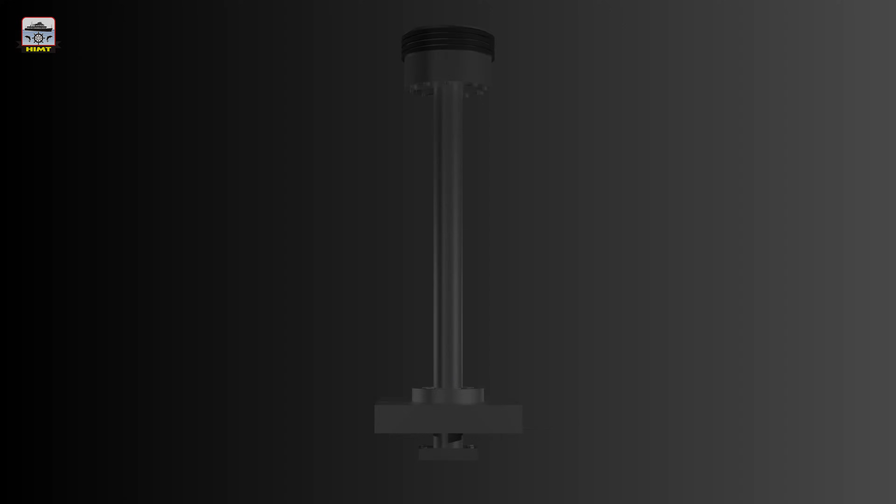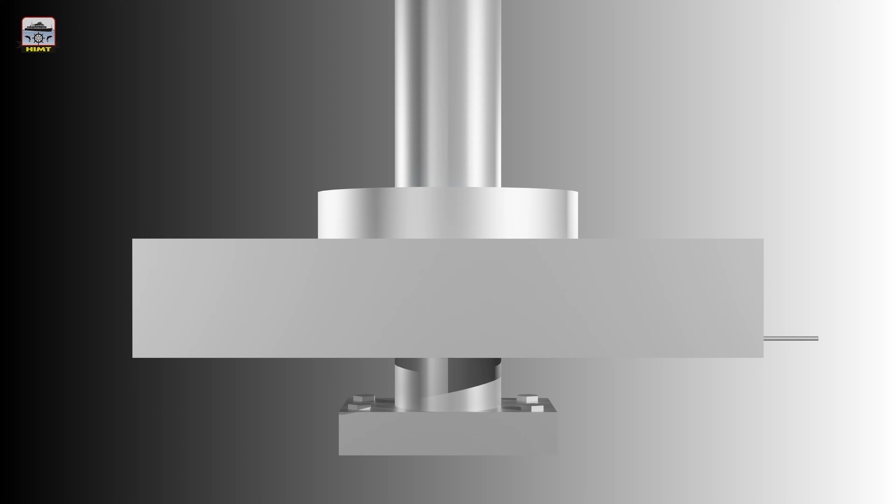A stuffing box is used in two-stroke marine main engine, which is of cross-head type. The function is to prevent crankcase lube oil going to scavenge space during piston upward stroke, and to prevent contaminated lube oil and combustion gases coming to crankcase during piston downstroke.

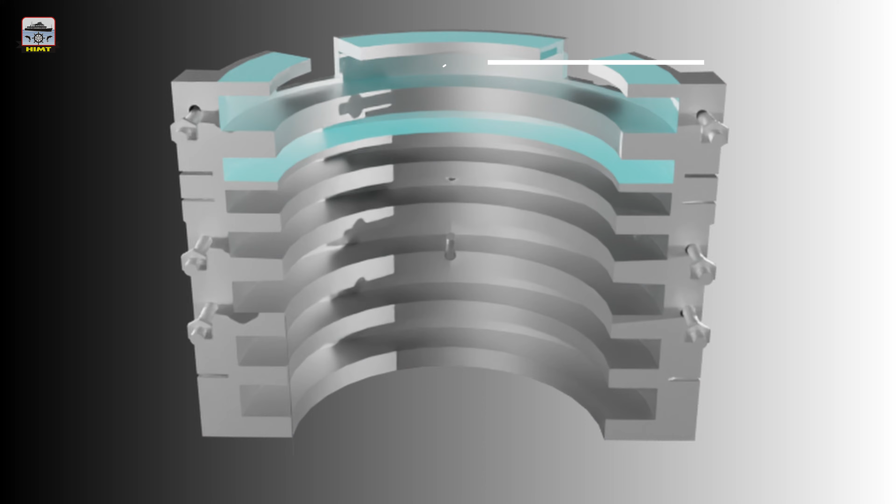The stuffing box is in two halves, vertically split and put together by fitted bolts and nuts. Inside of the housing, many circumferential grooves are provided. The two uppermost grooves accommodate sealing rings to prevent blowing down of scavenge air along the piston rod. The bottom grooves are fitted with scraper rings to scrape lubricating oil from the piston rod. The sealing rings are in most cases made of brass, while scraper rings are made of steel.

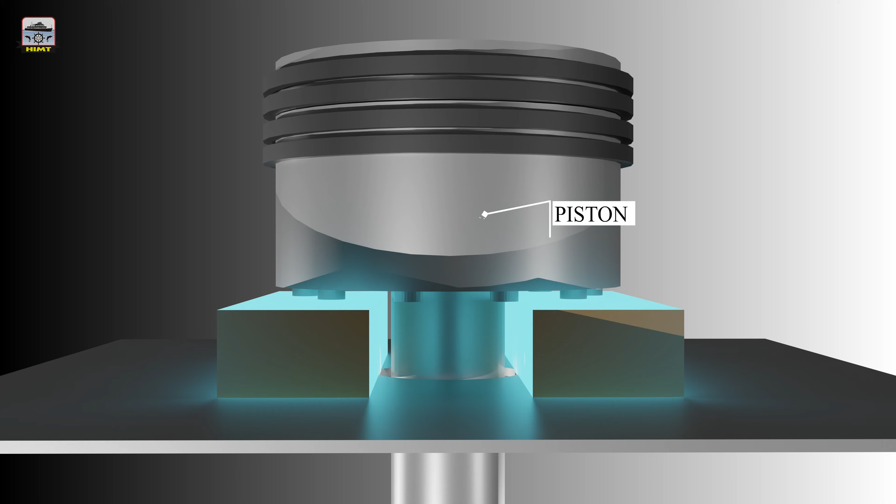Normally, overhaul of the piston rod stuffing box is carried out by routine methods in connection with the overhauling of the pistons. The piston is pulled out of the cylinder for the overhauling. During such overhauls, the piston rests on a support placed over one of the cutouts in the top platform. Work on the stuffing box is then carried out from the platform below.

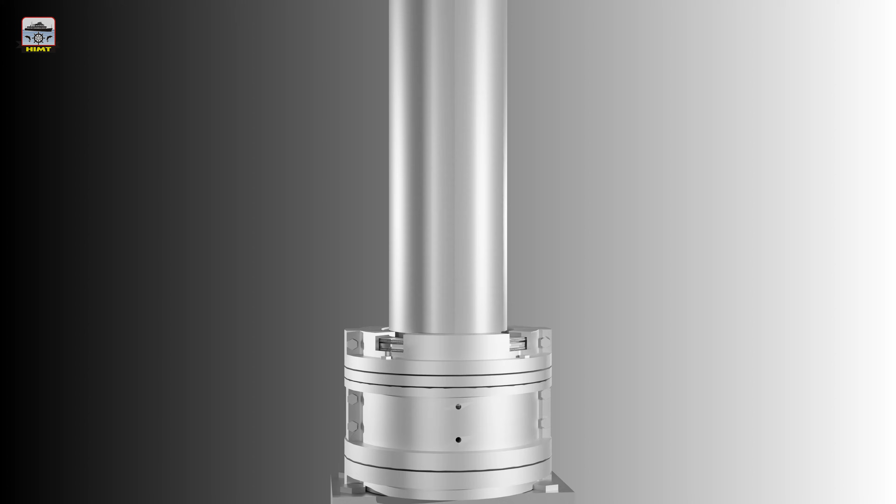If, in the period between piston overhauls, it becomes necessary to inspect the piston rod stuffing box, proceed as follows. However, this video description must be taken only as a guidance. Turn the crosshead to about 90 degrees from TDC. Mount the rubber cover around the piston rod to protect the crosshead bearing from impurities. Remove the drain oil pipe after removing the securing screws.

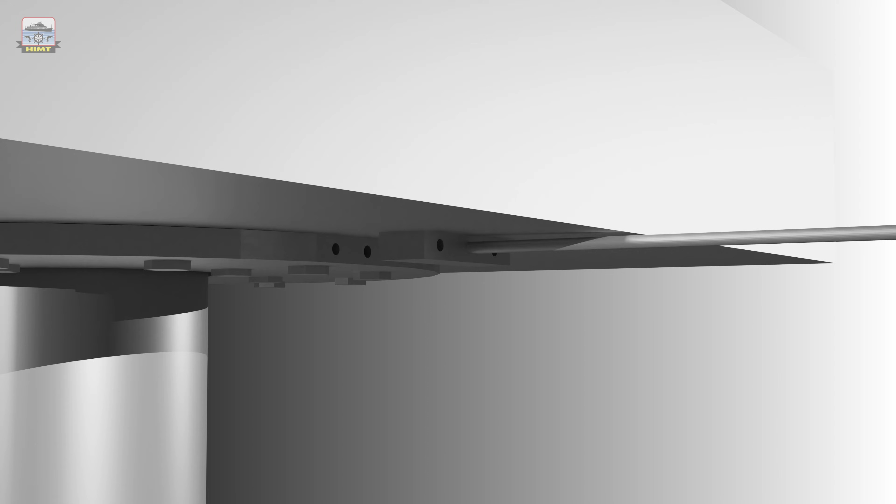The stuffing box is secured to the flange at the bottom by the innermost screws. The outermost screws secure the flange to the bottom of the diaphragm. Remove all innermost screws. Now, remove all outer screws except for two screws placed diametrically opposite in the stuffing box flange, longitudinally to the engine.

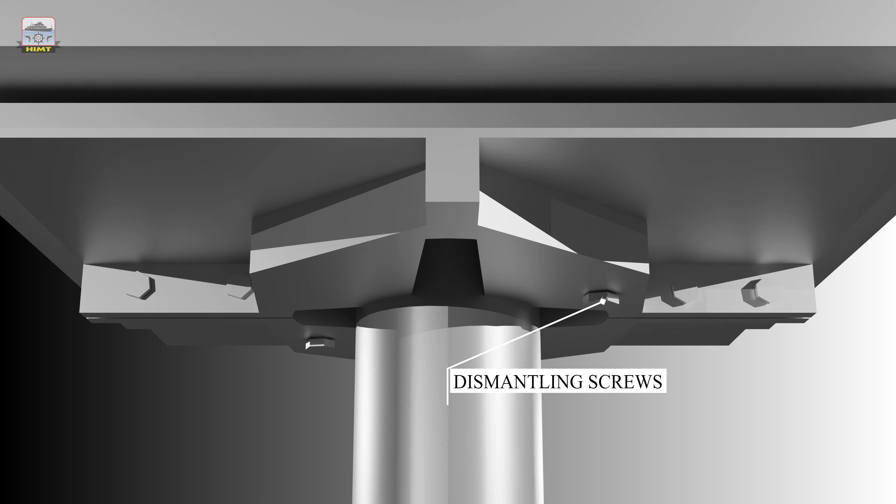Fit the worktable around the piston rod so that the two remaining screws in the stuffing box flange can be loosened through the holes. Using the two long dismantling screws provided with the work table, secure the stuffing box along with the work table. Remove the remaining two screws from the stuffing box. Turn the piston to BDC, thereby withdrawing the stuffing box from the cylinder frame bottom. Remove the two long dismantling screws from the stuffing box.

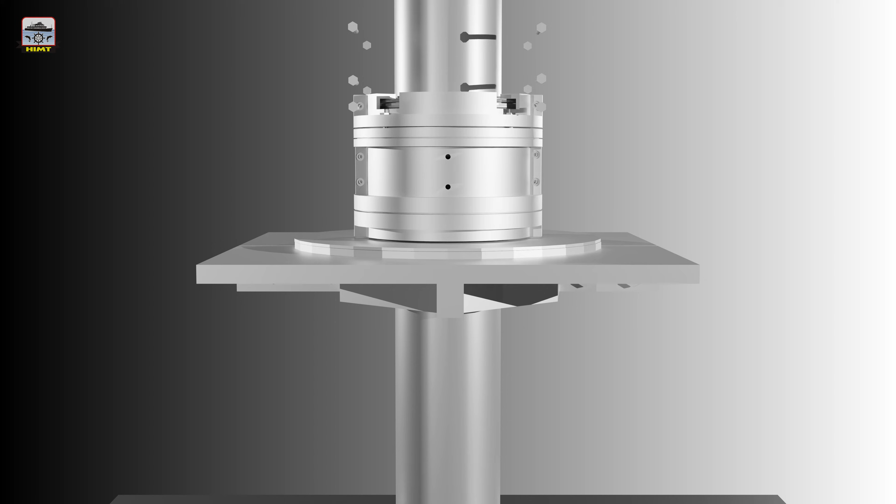Press the stuffing box out of the flange. Overhaul the stuffing box as described below. Remove the O-ring of the stuffing box. If the O-ring is intact and is to be used again, move it up the piston rod and secure it with a tape. Remove the nuts from the stuffing box assembling bolts. Take out the 6 bolts. Pull away one stuffing box half and remove it from the work table.

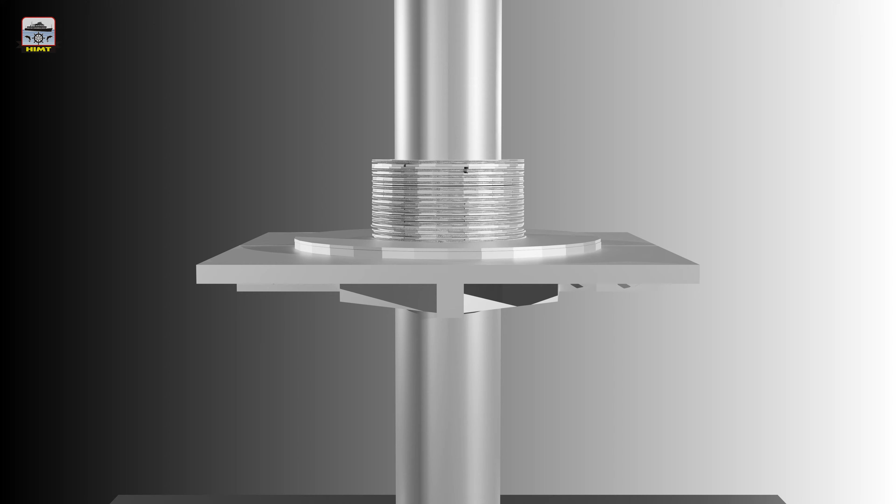Using a feeler gauge, measure the axial clearance between the rings and grooves. Remove the remaining stuffing box half. Press all sealing rings and scraper rings down against the work table. Remove the spring of the topmost ring set. Using the tool provided, measure the aggregate of all butt clearances between the ring segments of the topmost ring set to determine whether replacement is necessary.

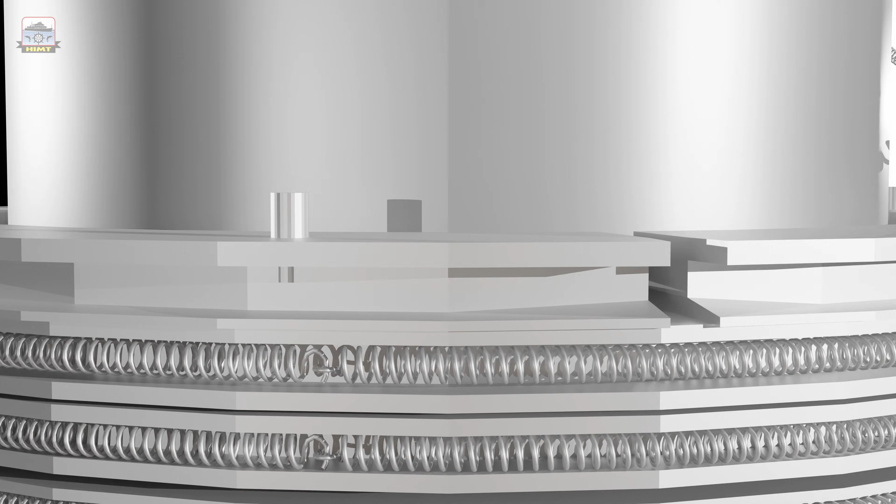Remove the rings and keep them in the marked place so that they can be fitted in the same order while boxing back in the stuffing box. Repeat the process of spring removal and butt clearance measurement for all ring sets. Carefully clean all the ring segments. Inspect and assess the surface quality of the sealing rings. If their sliding surfaces have scratches or marks, replace the rings. Check the links of the springs.

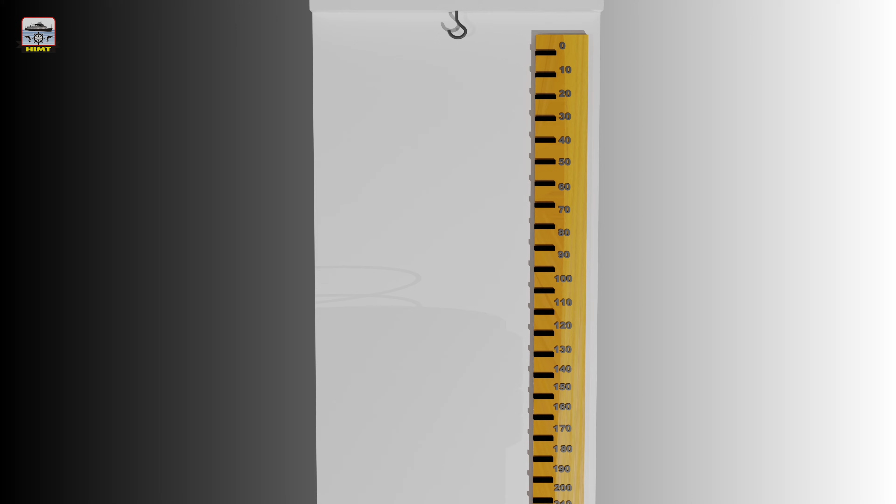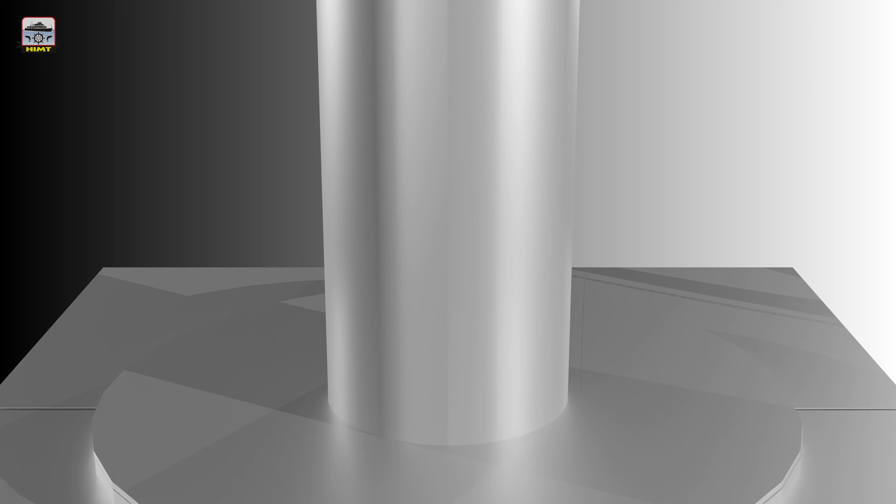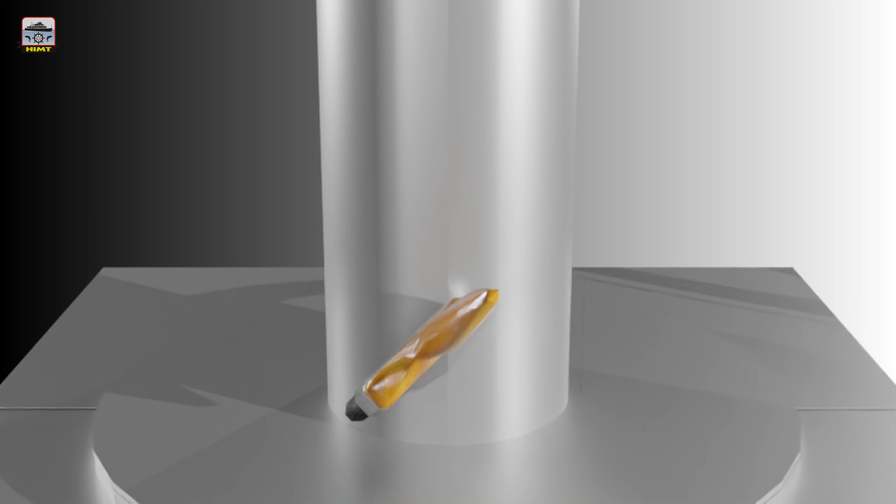Inspect the surface of the piston rod. If small longitudinal scratches have occurred caused by poorly adapted stuffing box rings, smoothen the piston rod surface carefully with a fine-grained carborundum stone. Clean the halves of the stuffing box housing. Lubricate the piston rod in the area where all the ring units in the stuffing box will be positioned with molybdenum disulfide. Place the lowermost ring segments on the work table.

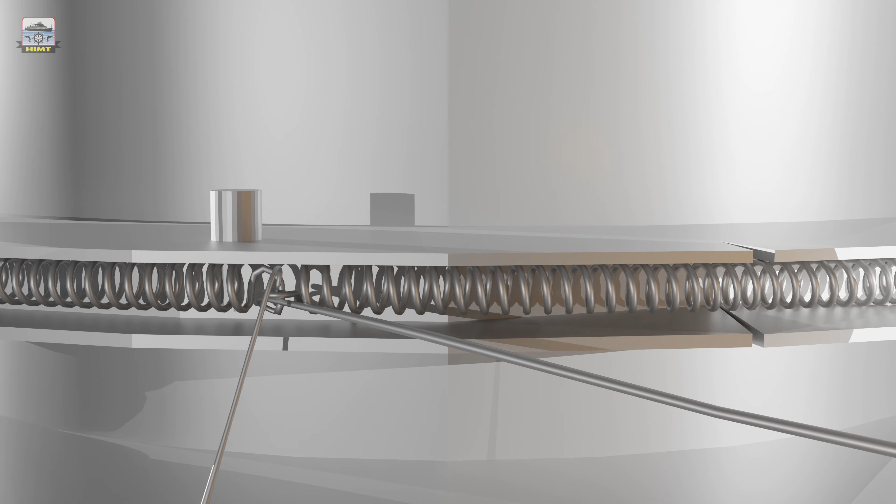Place the spring around the segments. Grab the hooks with crossed arms and pull the spring tight. Hook the spring ends together and remove the hooks. Repeat this procedure for the remaining rings. Try to position all the rings with an equal distance between them. Use the stuffing box gauge tool to adjust the spacing between the rings.

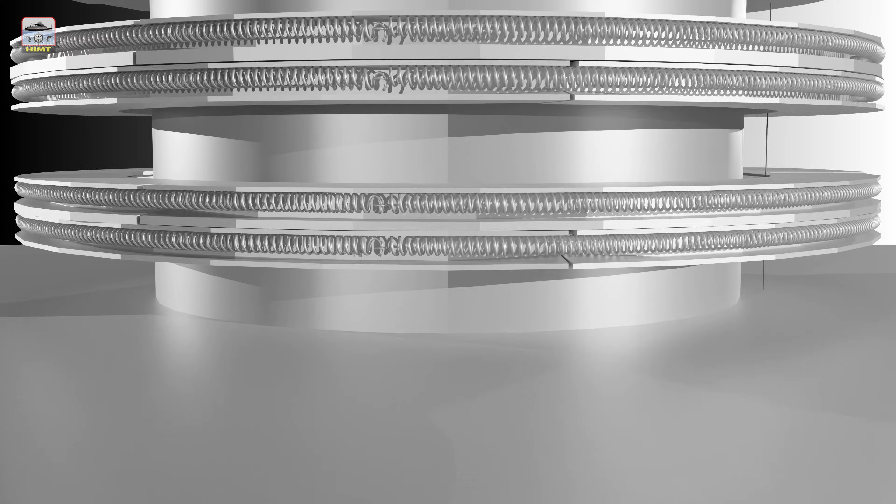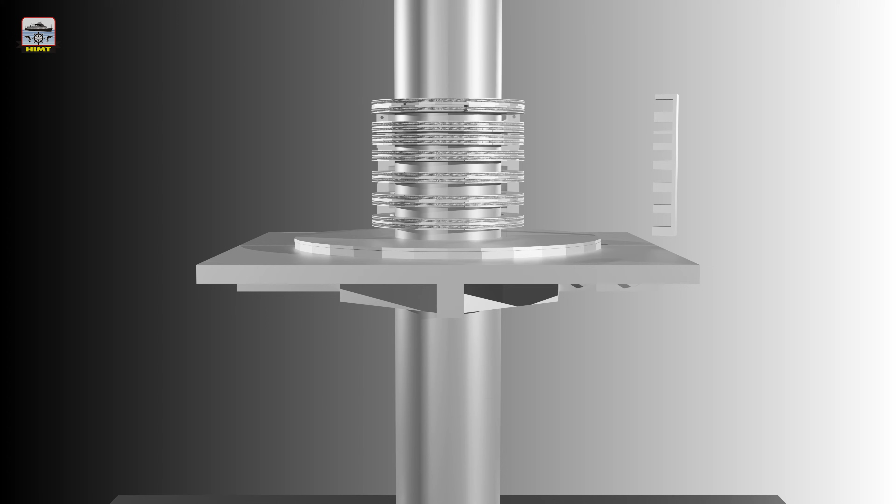This is done by carefully inserting the teeth of the gauge tool within the rings and then carefully moving the gauge along the springs. Use the stuffing box half on the work table to adjust the height of all the assembled ring units on the piston rod until the ring units are matching with the corresponding grooves in the stuffing box housing. Subsequently, push the stuffing box half into contact with the piston rod, round the ring units.

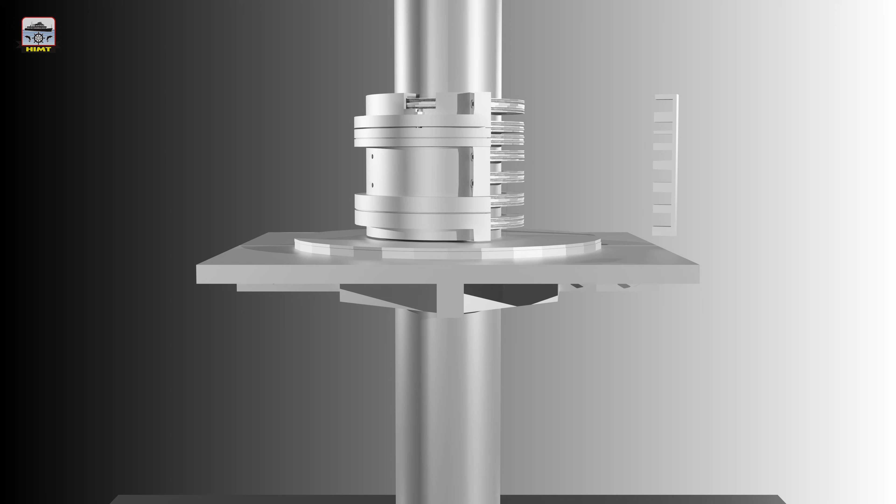Insert the gauge tool at one end of the stuffing box half and carefully slide it along the entire length of the scraper and sealing rings, thus adjusting the distance between the remaining exposed segment. Push the other half of the stuffing box into contact with the piston rod, thus enclosing the ring units. Mount and tighten up the fitted bolts to the torque specified by the maker. Tighten the other bolts to the torque specified.

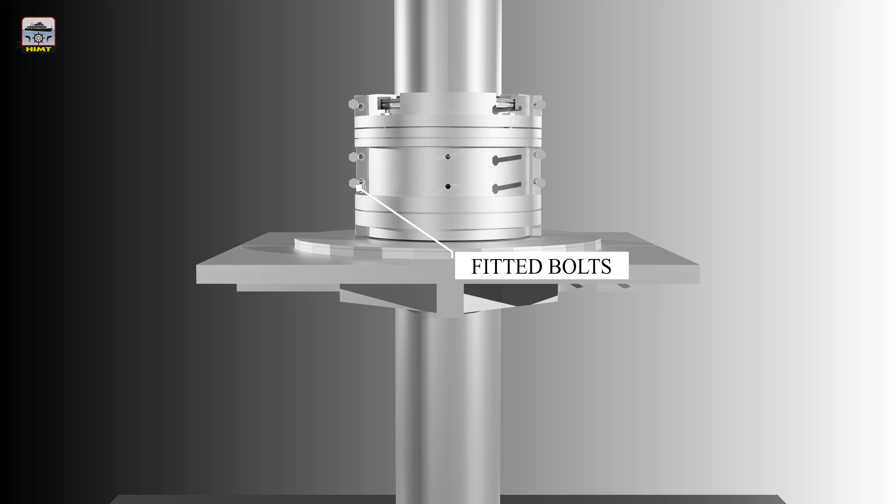Mount the O-ring in the stuffing box groove, and fit the 2 long screws in the stuffing box through the holes in the work table. Turn the crankshaft slowly using turning gear to take the stuffing box into its position in the cylinder frame, keeping in mind that the working table should not touch the cylinder frame. Make sure that the 2 guide pins in the flange enter the guide holes in the bottom of the cylinder frame. Insert 2 outer screws through the holes in the work table and tighten the flange of the stuffing box with the cylinder frame.

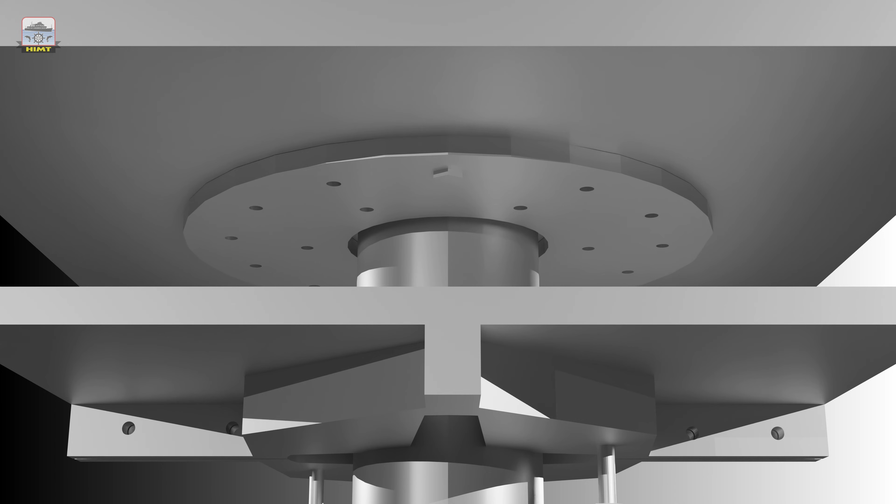Remove the long screws from the stuffing box and mount them in the work table. Turn the crankshaft carefully in a direction that will bring down the working table to a convenient position to dismantle and remove it from the piston rod. Remove the work table from the piston rod. Mount and tighten all the outer and inner screws for the stuffing box. Mount the drain pipe with the flange of the stuffing box. Remove the protecting rubber cover from the piston rod above the crosshead.

Hope this video helped you in understanding the constructional feature of the stuffing box and the in-situ overhauling procedure of the stuffing box.